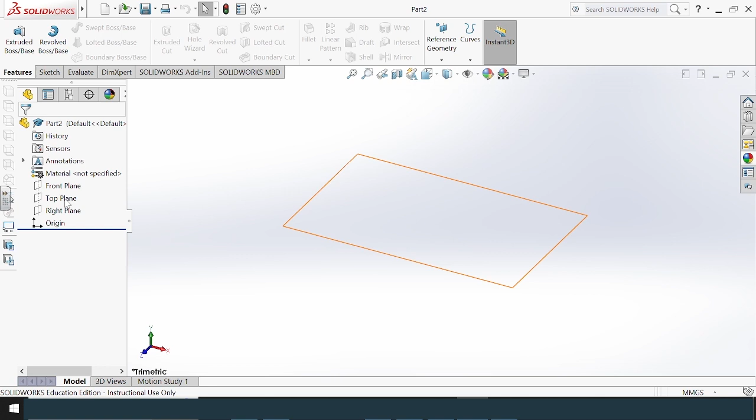First of all, click on File, New Part, click on the top plane, right click, Show Top Plane, click on Sketch, making sure the plane is highlighted.

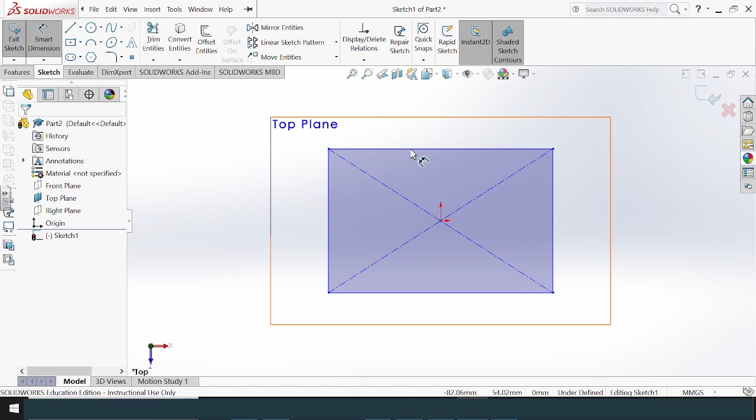Click onto Center Rectangle, click into the center where the dot appears orange, click and drag, then click on Smart Dimension and click onto the line. It should highlight orange, but in this case it hasn't. Click, type in 100, and press Enter or the tick button.

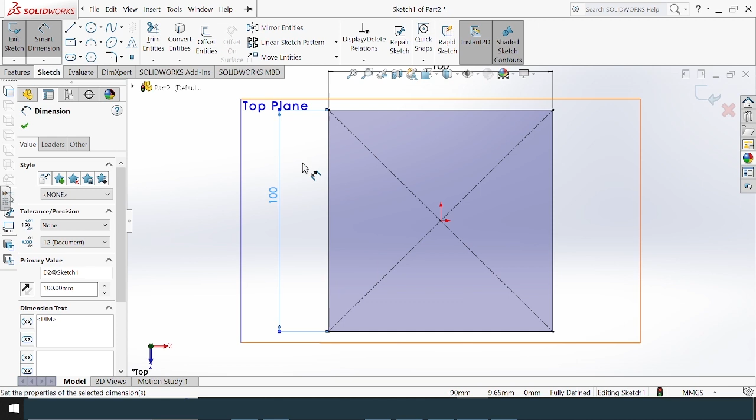Do the same for the second side: click, drag, click, type 100, then click the tick. Next, click onto Features, then Extruded Boss/Base, and you can drag the arrow up or type in 100.

With your mouse button you can zoom out using the rolling mouse button. Then click on the face, and click on Sketch.

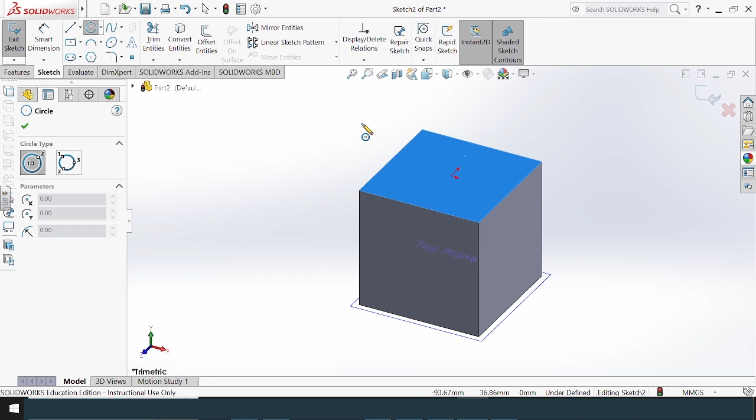Click on Circle. If you press spacebar, you can click onto any view, such as the top view or Normal To, which will take you to the top orientation.

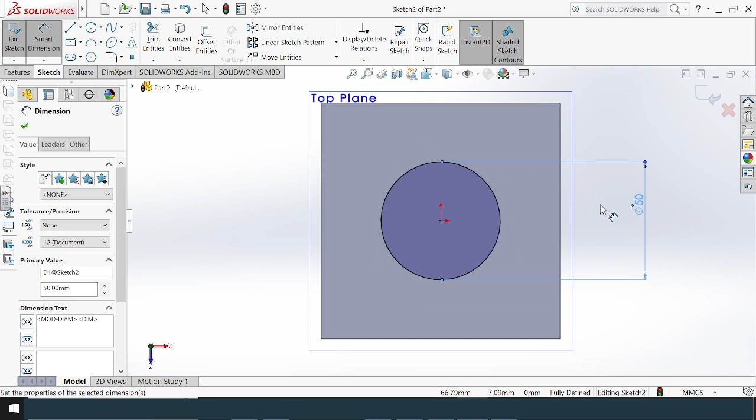Click into the center, click and drag, then click on Smart Dimension, making sure it's selected. Click onto the outside of the circle, it should highlight orange. Click, drag, and make this 50, then tick. You can rotate with your mouse button, or press spacebar and click on Isometric View.

Click on Features, then Extruded Cut, and drag the arrow all the way out.

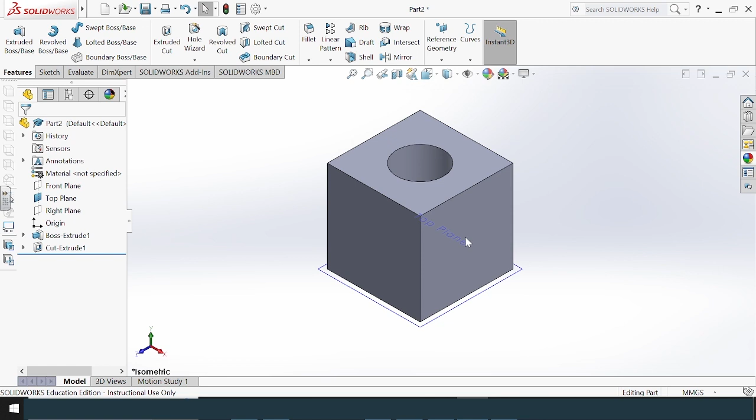The next step is to make a hole on the second face. There are two ways to do this. The first method: click onto the face, press spacebar, then Normal To.

Sketch a circle. You'll notice there is no midpoint, so sketch the circle first, then use the Smart Dimension to move the circle into the middle.

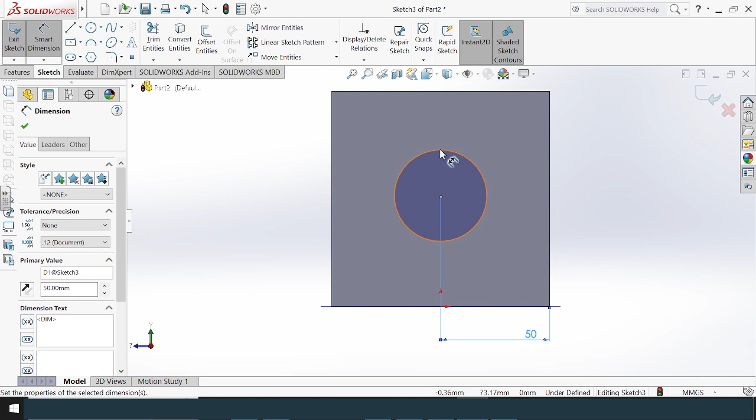So I'll first place this at 50, that's 48.50, so I'll make that 50, and then dimension this circle to 50. Again, go to Features, rotate this, Extrude Cut, and tick.

The second method is to click onto the face, click on Sketch, and create a midpoint using the center line. If you click on the center line, it should select onto the center.

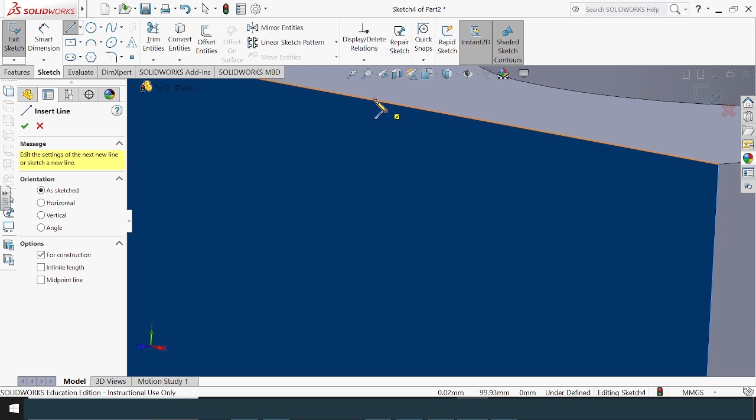If I zoom in, you can see. So click, and do one horizontally - click onto the center, click onto the center. Now you have your midpoint.

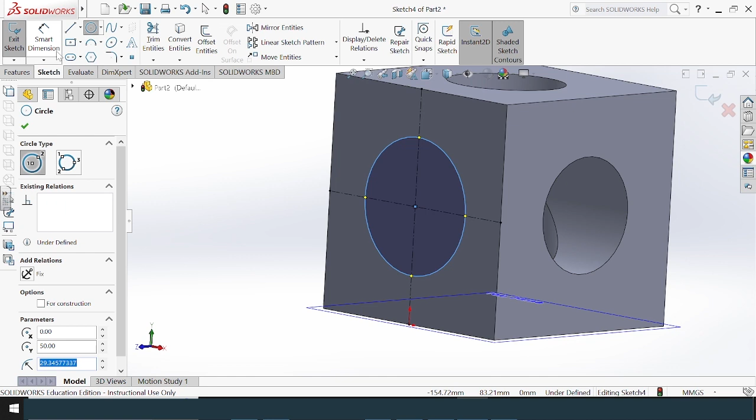Click on the center, draw the circle, and Smart Dimension this into 50. Then click onto Features, Extruded Cut.

Then save this file, save as holey cube.

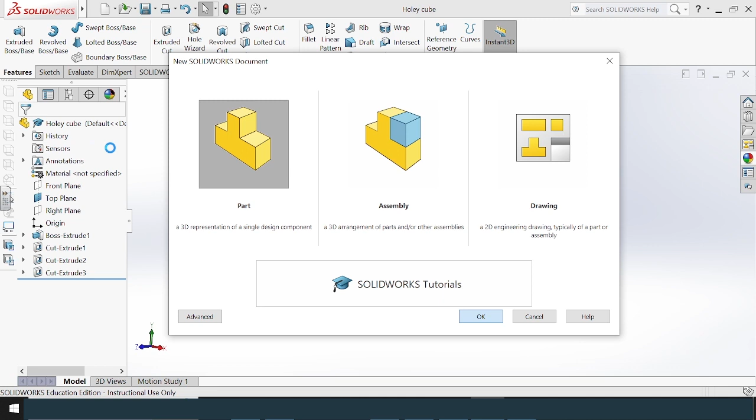To make an unholy cube, again go File, New Part, and repeat the steps: top plane, center rectangle, Smart Dimension, 100, click, 100, Features, Extruded Boss/Base, 100, tick.

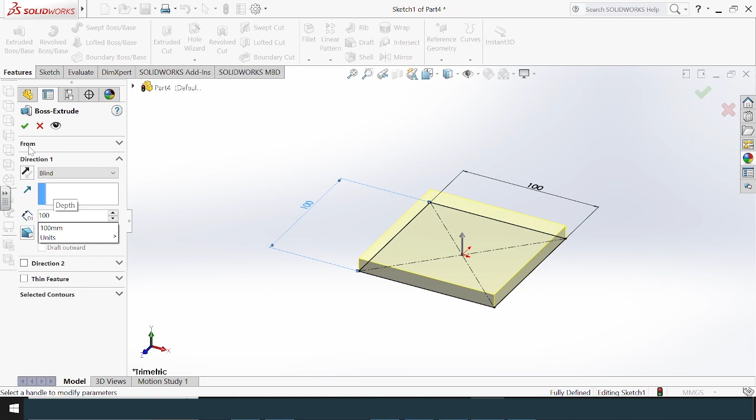Sketch. First, click on the top face, click on the circle, click, drag to 50. This time it will be Extruded Boss/Base, so we'll make that 50.

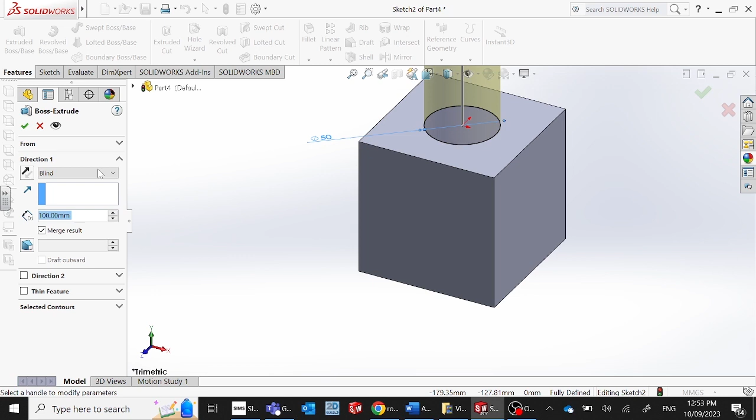Zoom out, tick. Same thing on the next face, so again, Sketch. This time I'll be using my center line. I could rotate this, so spacebar, Normal To.

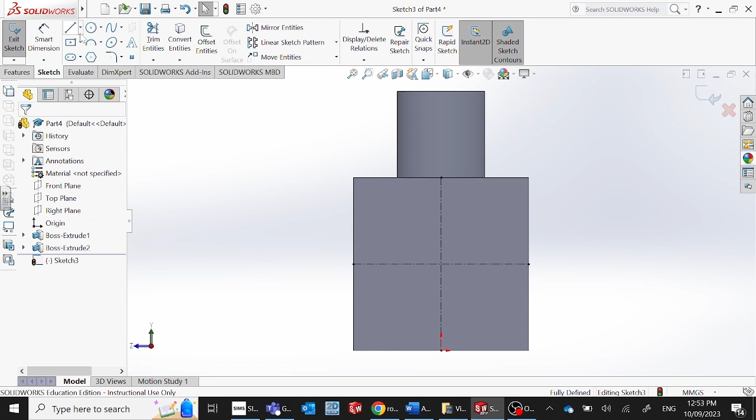Find the midpoint using the center line, create the midpoint, draw the circle, and extrude that 50.

Next face, click, Sketch, center line, just click, then with your mouse button press the right button, click on Select, to deselect.

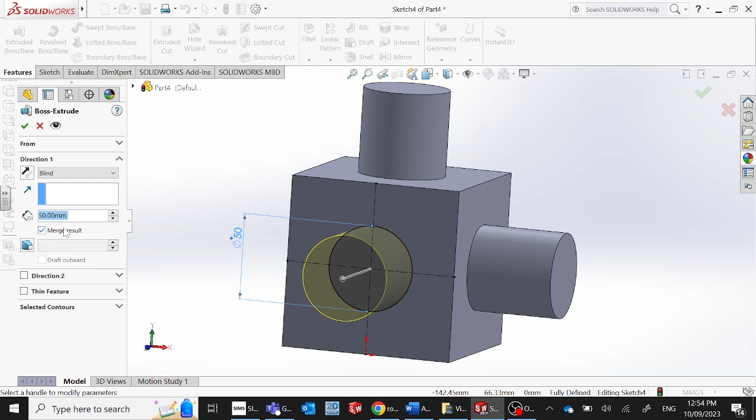We just do two sides from this method in this video. Then click on Features, Extrude Boss Base, which automatically selects 50, click on tick, and then save this as holey cube.

Save this as - this should have been unholy, the first one should have been unholy cube. We'll save this as unholy. Okay, next thing is we need to assemble these two parts.

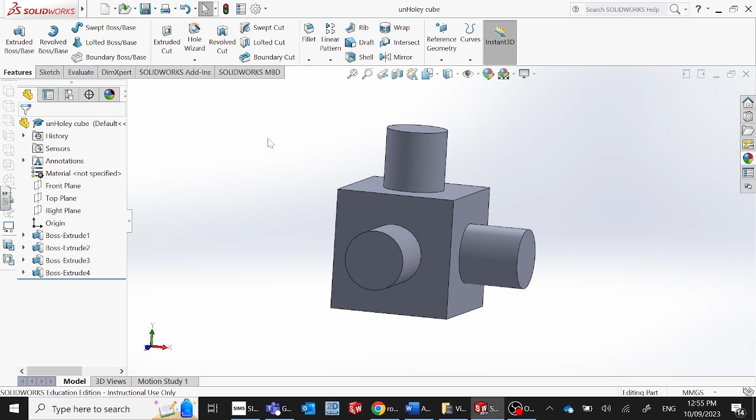If I click on File, Make Assembly From Part, click onto the holey cube, then insert component, click on Insert Component, holey cube - wrong one - unholy cube, insert component, unholy cube.

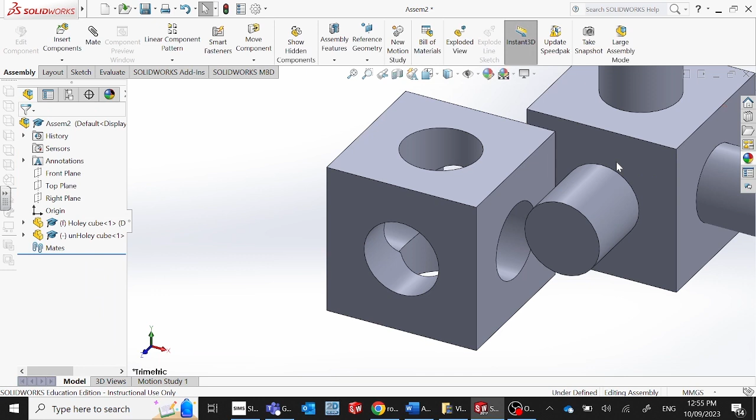Then we need to make this, so we click onto Move Component, click on the arrow, click on Rotate, and rotate the shape. Click on this paperclip item, Mate, and then you select the faces that you want to mate.

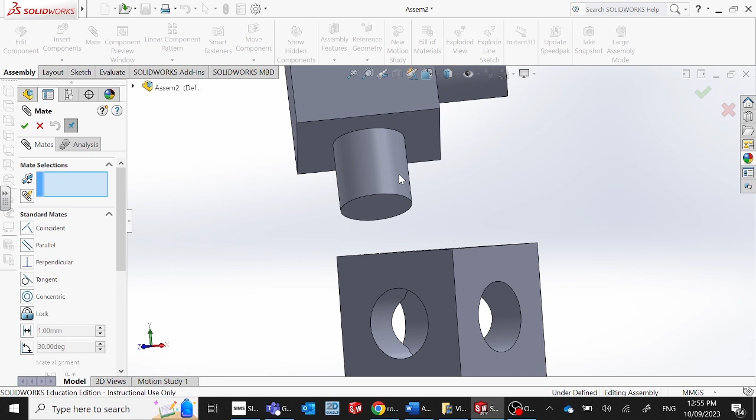So I want to mate this face with this face, tick, this side with this side, tick, and at this stage you can see that the cube will move up and down.

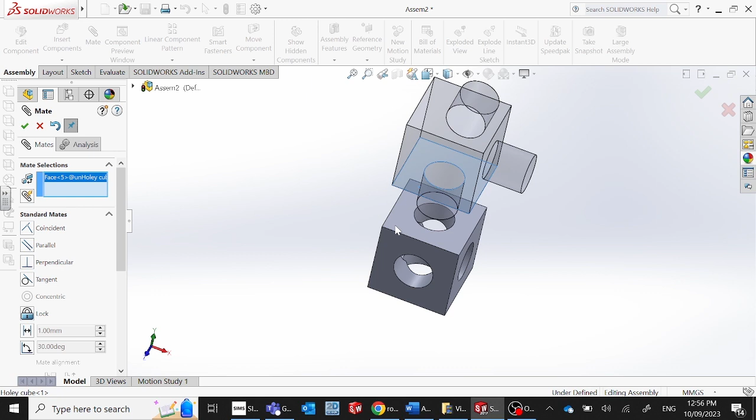So if I want this to be locked, I'll click onto this face and mate it with this face, then click on tick, and then you can save this as an assembly.

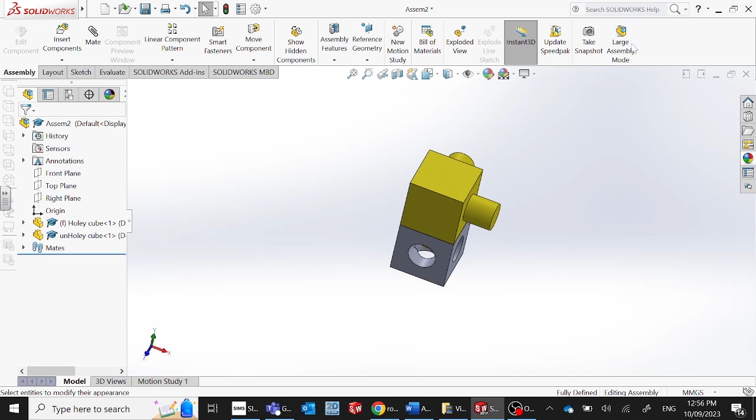And if you want to add material, just click onto the appearance panel here, click on any material. Let's click on some plastic, and then you can just drag and drop material onto your shape. Save all.